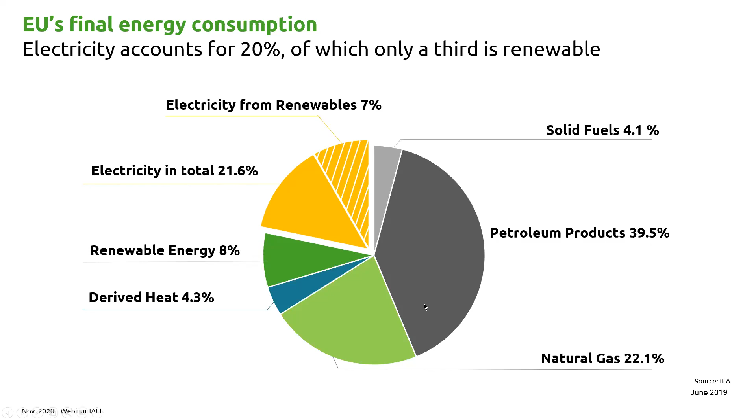But I think this pie chart alone shows that there's still quite a bit of work ahead of us to change the generation of electricity to renewables before we start producing renewable electricity for the other sectors which are using energy as well. So we need molecules, not only to achieve the decarbonization in all the sectors, we need them also for storage.

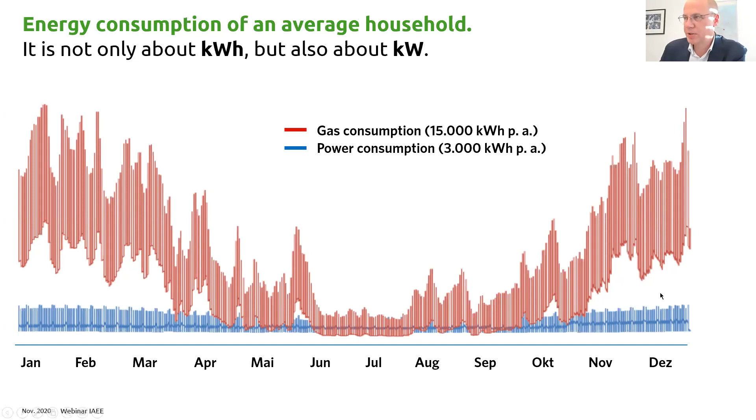And this has led to the situation that we see a very strong political ambition to move towards hydrogen. Not only do we have, since July the 8th, a European hydrogen strategy in place, which has a lot of perspectives on delivering hydrogen, but of course we see many national and regional hydrogen strategies. So the idea of using hydrogen as the second pillar of the Energiewende is trickling down to the individual governments and municipalities. And it's not only the European Union, but also its neighbors are clearly delivering in terms of hydrogen. So it is a very broad trend, and the individual economies are contributing with their individual perspectives.

I think the first market that we will see where hydrogen will play a role is, of course, those where hydrogen is already existent. We have 60 terawatt hours of hydrogen, for instance, here in Germany, being used mainly for the production of methanol, fuels, and ammonia. This is still gray hydrogen, which is waiting for decarbonization. So I think the very natural approach to a new hydrogen market is to replace the gray hydrogen, which is already quite a bit of hydrogen that needs to be produced coming from renewable or carbon neutral sources.

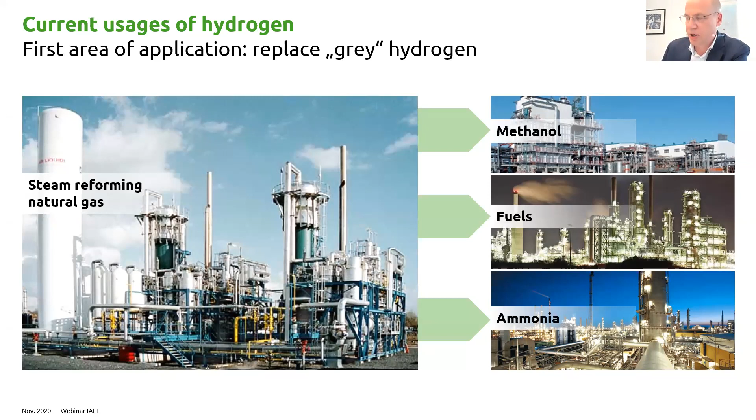But of course, the ideas are very wide-ranging where hydrogen can be used tomorrow. It could be used in turbines, it could be used in stationary fuel cells as combined heat and power solutions. Mobility is a very strong condition. And of course, industry, the German steel industry is strongly asking for hydrogen to move their processes towards carbon neutrality.

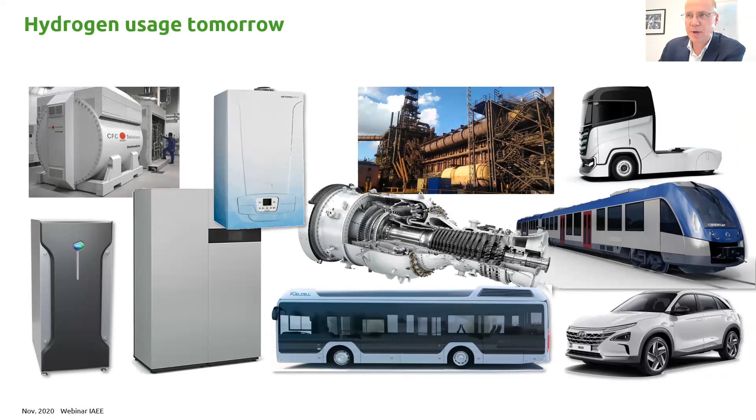But let me please focus on one specific area where we think hydrogen should play a major role as well. That's the heating sector. That can be reached by boilers, but also by fuel cells. I will show that later. Why the heating sector? It accounts for 40% of our energy consumption. It's mostly molecules. In Germany, we have still many boilers with oil. We have 20 million gas boilers. We have them connected to a grid that is able to deliver hydrogen to the home.

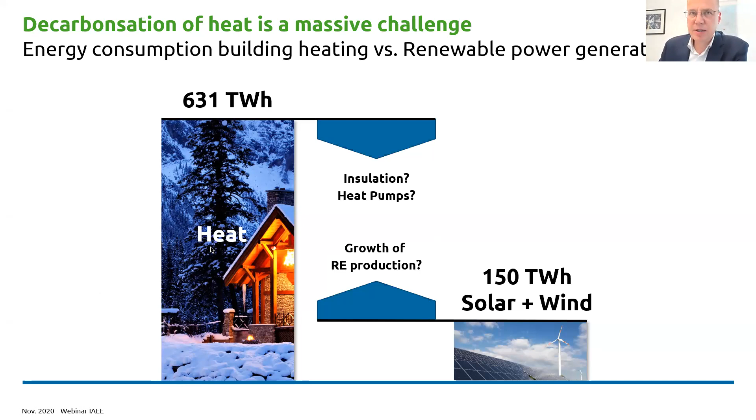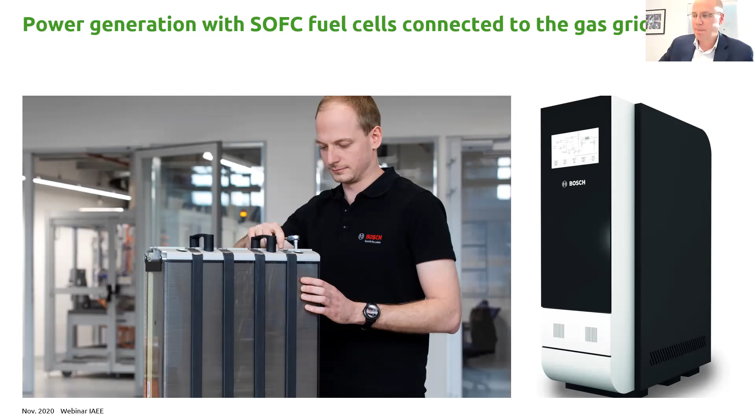We also have larger installations like the SOFC fuel cell coming from Bosch, delivering 10 kilowatts of electricity. It's scalable up to 1 megawatt, which is mainly focusing on decentral electricity production at an efficiency rate of 60%. It's producing electricity at a higher efficiency than many of the large-scale thermal power plants.

But where should the hydrogen come from? We should certainly focus on a broad range of opportunities. Electrolysis, of course, is the first choice because it's integrating renewables, it's storing intermittent renewable energy sources. But this alone, if you do the math, you will see that this alone will not deliver enough hydrogen to provide a contribution to the decarbonization effort. So we need other solutions.

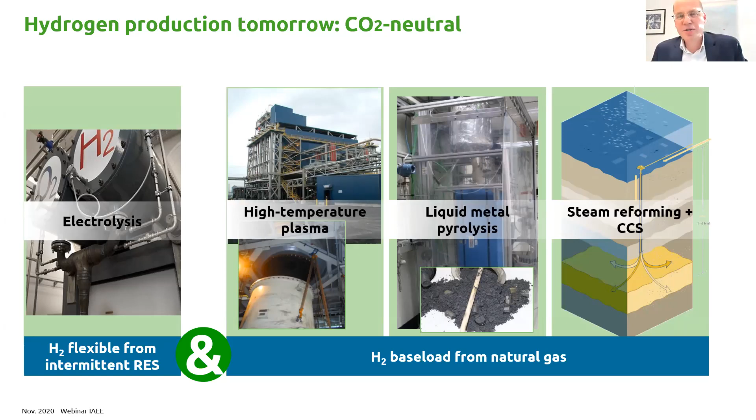We need pyrolysis as a solution. We need steam reforming. Particularly steam reforming is something that our Norwegian colleagues are strongly developing. Their very ambitious Longship project looks extremely interesting and promising. But we should also, and that's something I would like to bring to the discussion today, we should also look into the system of pyrolysis. Let me briefly show you what it's all about.

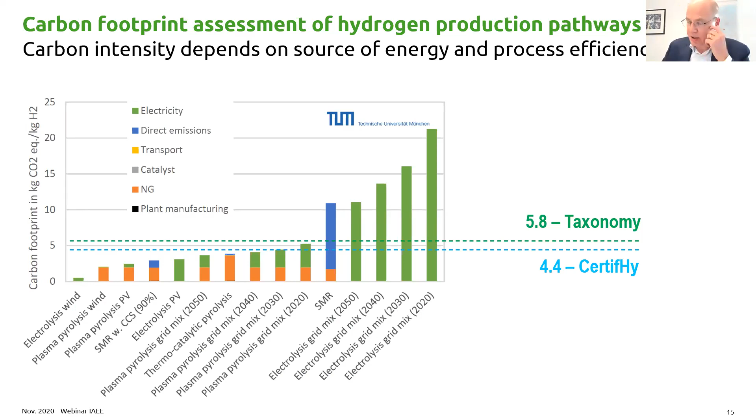You see that electrolysis, for instance, is very much dependent on the input energy, of course. You see also that other routes can deliver, depending on what kind of measure you take, if it's the EU taxonomy or the CertifHy project, carbon neutral hydrogen that can be used for decarbonization. And you see that particularly the routes with pyrolysis seem to be quite interesting looking at this comparison.

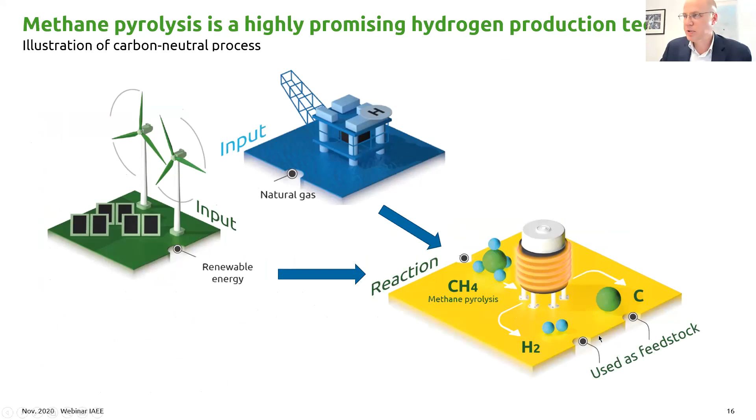Pyrolysis basically is nothing else than splitting up the methane molecule, CH4, delivering at the end hydrogen and carbon. As the feedstock, the process requires, of course, natural gas, which is an ample resource, and uses renewable energy as an input energy to split up the methane molecule into its core substances, hydrogen and carbon. Hydrogen can be used in the grid, of course, in different routes.

Carbon is an interesting feedstock today used for polymers, pigments, and also for batteries. In future, it can be used for building materials, soil enrichment, and other bulk resources where you need high amounts of this kind of feedstock.

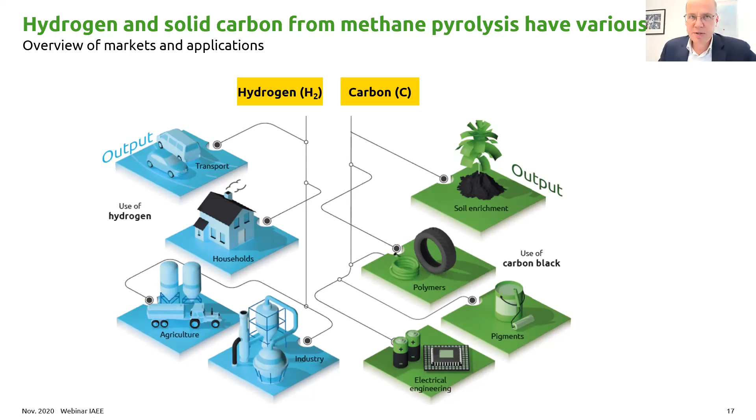Very interesting technology that should be considered also as a solution for further hydrogen production, and this is the core reason why we feel that this is a very fascinating solution, particularly because it's much simpler to split up the methane molecule than splitting up the water molecule that the process of electrolysis is based on. The chemical situation is that the bonding between the hydrogen and the carbon is much weaker than the bonding between the oxygen and the hydrogen atoms in the water molecule.

For this reason, it requires only 1/7 of the energy to split up methane in order to create carbon neutral hydrogen, because no CO2 is released into the atmosphere. And if you use renewable energy as a feedstock for this pyrolysis technology, you can create 3, 4, 5 times, depending on the engineering efficiency of the pyrolysis technology, and there are different routes available, 4 times the amount of hydrogen based on one input unit of renewable energy. So you have the factor of 4 based on the input electricity coming from renewables.

So a strong lever for linking the renewable energy production with the gas grid, and of course, multiplying the input energy coming from wind and solar. Very promising technology, linking also the gas industry with renewable energy so that we have a good solution for providing large amounts of affordable hydrogen.

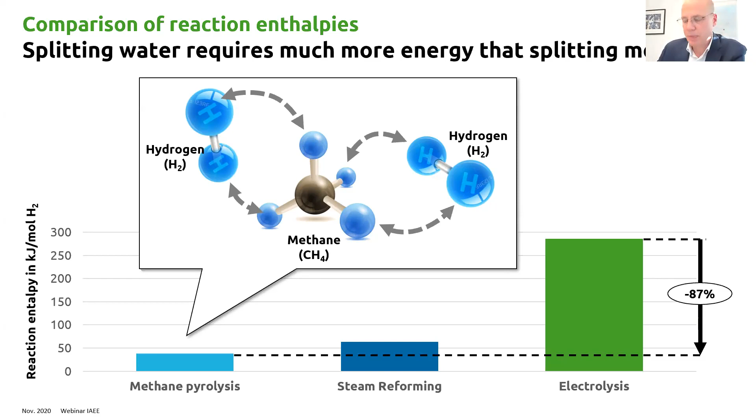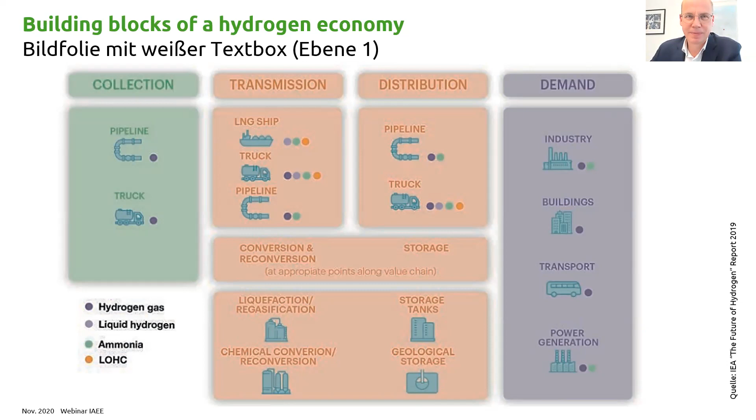Thank you very much, Tim. I think this was a very basic, sound and comprehensive introduction into what hydrogen can do in the system, what hydrogen can contribute, and where hydrogen comes from. From my point of view, this is not, in an international dimension, fully clear, because we are now discussing huge amounts of hydrogen from huge amounts of renewable electricity. And I think neither Germany nor Austria nor any other northern country will really be able to produce these quantities. However, Germany has already agreed with Morocco on a joint venture with respect to electrolysis from the desert, which is quite an interesting international idea.

So just a little bit on where I'm coming from, OGE, Open Grid Europe. Here you see a map of Germany, and basically this is showing the main transmission system pipelines that we own and operate. You see here also where we are located. It's the largest gas TSO in Germany. We have about 12,000 kilometers of pipeline.

Just for reference, the send-out to customers in Germany, which could be big industrial customers, or it could be DSOs that take over the volumes to distribute them further, was 650 terawatt hours in 2018. This is not including the transit volumes, which also flow through our pipelines, for example, from east to west or from north to south.

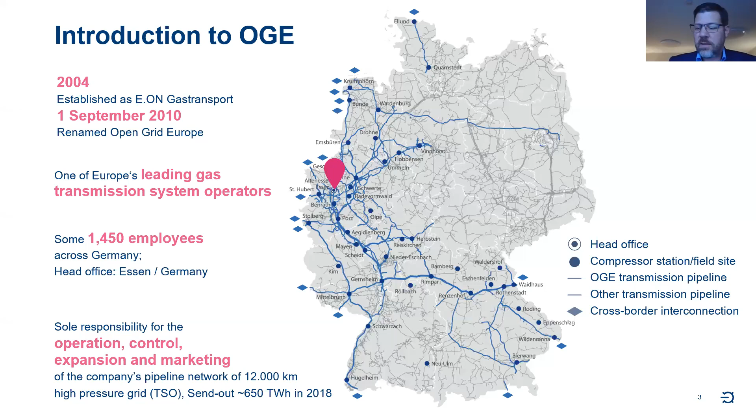So as Georg put it, if you're operating a national gas grid and you are confronted with the fact that we want to decarbonize, there are a few questions you need to answer, especially to your shareholders, as to what is your future contribution? Can you actually help in making this decarbonization a reality? So for that, it's important to know who we are owned by. And unlike in some other countries, the infrastructure is not a state activity, but it's privately owned. And we are owned by these big names that some of you may know. So institutional investors, managing pension funds, and very keen on a long-term strategy.

And when I was hired into the company, one of the first questions was really, what is the place for OGE in decarbonization? And what is our strategic answer to that? Which brings me to the big picture. And again, you will see some repetition of what Tim said, but maybe from a slightly different angle.

One thing which I think is very important: whenever we're talking about hydrogen, we're not really talking about hydrogen. We are talking about how we can achieve climate targets and find the most efficient way of avoiding CO2. And some of us, and I think especially Tim and myself are in this group, believe that letting hydrogen play a big role alongside renewable power might be a clever way to do so. So this is actually what we are trying to achieve. And we all know, here you see CO2 emissions, they're supposed to go down almost to zero in 2050. That is only 30 years away.

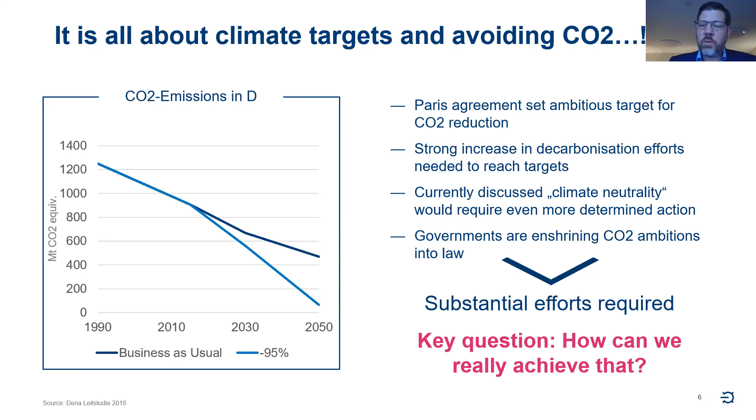And we are big energy consumers. So how can we actually achieve that? This is the key challenge that we all have.

It's also a problem that usually you don't have the green power in the area where you need it, so you need to build a lot of power lines. That's the capacity picture. Another view is the quantity, the energy amount picture.

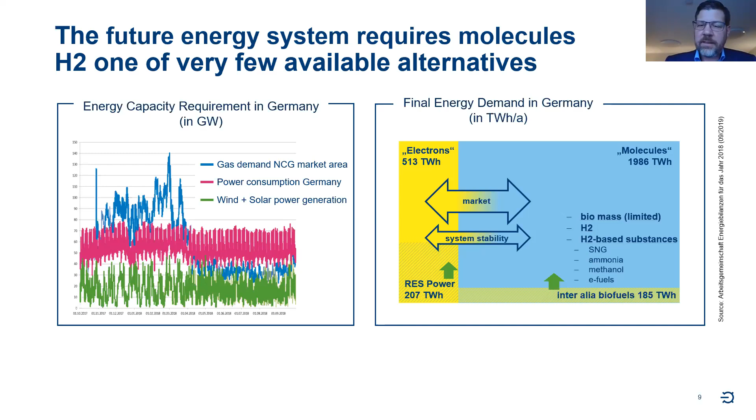If we look at today's technologies, depending on where you are in the world, you might have quite some potential on biomass, but we know this is not available everywhere. Then you pretty quickly end up with, well, if you have molecules, you have a chemical energy carrier — that could be H2 or something related to H2. This is why we came to the conclusion, taking these two pictures, you need to store and transport large amounts of green energy. You need additional decarbonization options available to all sectors, especially sectors where you have trouble decarbonizing with power. It's also not the worst thing to have an energy system standing on two feet: one electrons, one molecule, when it comes to resilience and security of supply.

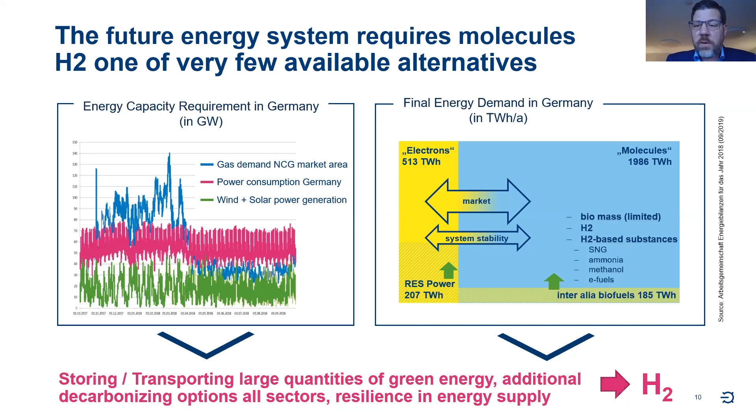So that's how we come to hydrogen in the first place. Now picking up on Reinhard's point, what's the difference compared to previous times? Why should hydrogen deliver this time? Well, I think there's five reasons for this.

The first one: we have a general awareness today that there is a lot of renewable energy out there on our planet. It's not necessarily always where we need it. That's why transportation and storage is important, but there is a lot of renewable energy, which may not have been the awareness a few 10 or 20 years ago.

I think the biggest difference is there is no alternative today. In the past, hydrogen came up, it was seen as technically viable, but extremely expensive. People said let's rather take oil or gas because we have it and it's cheap. If we want to defossilize the industry, that is not available anymore, so we don't really have an alternative.

I think also we have become much more comfortable with economies of scale. If you look at the development of the cost of solar or wind energy, that has decreased big time. That means producing power with renewables is much cheaper, and electrolyzers, who today are mostly put together by hand, could be much cheaper if you think about industrial production.

From a European perspective, Europe has a front-running option. We have a very interconnected gas infrastructure all across Europe. If you could make that available for hydrogen, you would have a basis for a European market, many sources, many sinks, that would also attract imports. And finally, we are in Corona times. Everybody's looking for economic stimulus, and hydrogen is offering quite some opportunities for industry leadership.

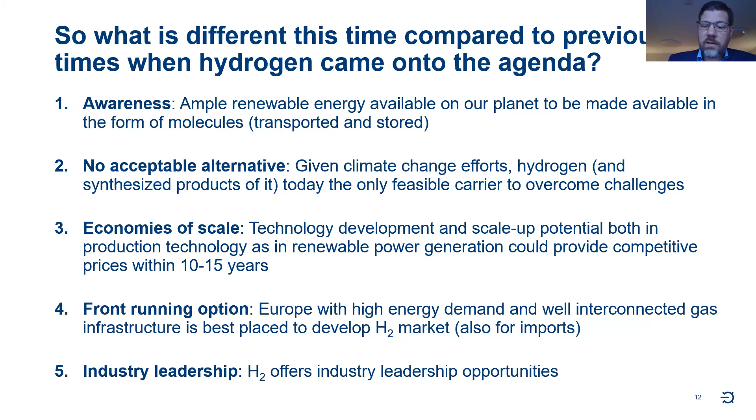If you dig into the subject, you will find many studies over the past 2-3 years that have concluded that the societal cost benefits, if you look at a mix of renewable power and green gas or decarbonized gas, are actually substantial.

Little spoiler alert, I'm coming to this later on. If you're using a gas pipeline with hydrogen, even though hydrogen has only 1/3 of the energy content per cubic meter, because the molecules are smaller and it actually flows faster, our experts, alongside the other European pipeline experts, have done analysis and concluded that your pipeline has about 80% of the energy transportation capacity if you use it with hydrogen.

So what does it mean for us as an industry? Well, the first thing is we cannot claim something if we really don't understand our assets. So we as OGE, and we know the other TSOs have done similar projects around H2 suitability, are really understanding all the components in our asset, existing pipelines as well as new pipelines. What about blending? I'll come to that in a second. And what about 100% hydrogen? We do that supplemented by exchange between companies and also with the associations. So a lot is ongoing, and we will see results being produced one after the other, which so far all look very promising.

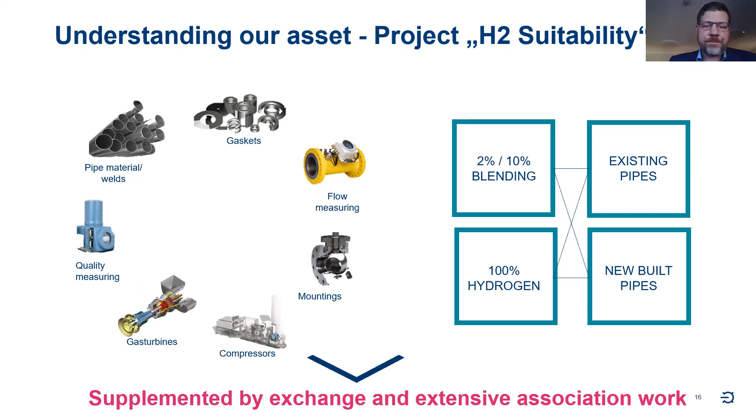The main reason for that is that we want from the outset to be prepared for trade, a European market, and security of supply. If you want to make sure that cross-border you have a free flow, it's much easier if you know it's 100% hydrogen rather than having potentially different blends in each country.

Also, if you transport hydrogen on a TSO level in a pure form, when you go further to the DSO level you're much more flexible. You can provide it to industry that needs it in pure form, or you can blend it on a regional level depending on the circumstances and the production facilities there. There are many reasons, and I can give you more when we discuss.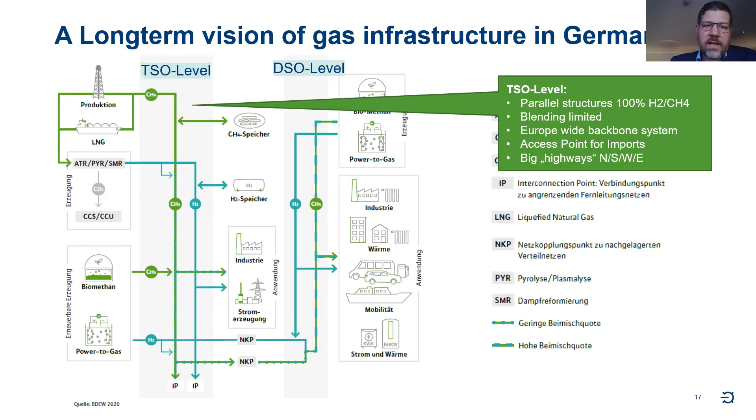So summarizing: at TSO level, parallel infrastructures, blending only on a very limited basis, this is the Europe-wide system and an access point for your imports - like the big highways, north, south, west, east. Whereas on a DSO level, we see more regional variety - there could be 100% hydrogen grids, blended systems, or biomethane. The DSO system actually benefits from methane and hydrogen pipelines bypassing each other, because then you can do pretty much every blend that you want.

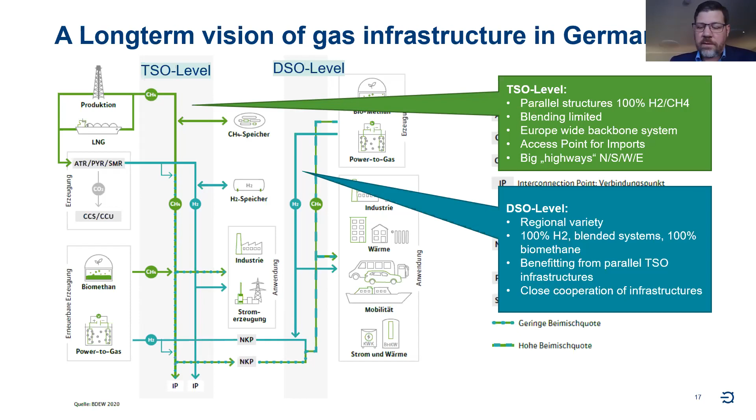The German TSOs has actually gone a step further. We have an established network development plan process, which is legally in place and approved by the regulator. We took this process and thought about how to take it forward.

We said, well, if the future system is partly depending on repurposed pipelines, we have to include it in the planning process, because the pipelines you take for hydrogen will not be available for methane anymore. So we asked the market for where their demand for hydrogen entry or exit from the system would be, and then calculated in a scenario planning how this grid would actually look, based on current market assessment.

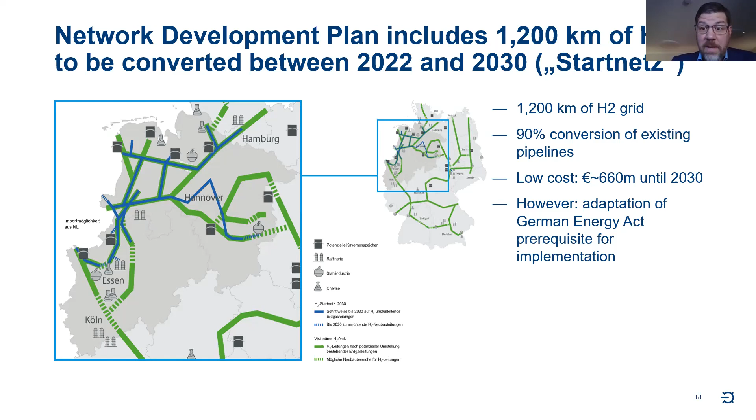You see here a part of Germany with the blue lines, which is what we call the Startnetz, the starting infrastructure where the first conversions would happen. Then the big picture, if you zoom out, shows all of Germany with the green lines - this is a 2040-ish view based 90% on converted pipelines, where we could access most of the demand areas and create a hydrogen infrastructure mainly based on what is there today.

As OGE, although focusing on infrastructure, we are cooperating with a whole load of companies to develop various perspectives, because we believe we need to get into this upscaling - getting away from the 1-2 megawatt electrolyzer and production facilities to 30, 100 or 1,000 megawatts, which is the gigawatt class, and the implications for infrastructure that has.

So just to give you an idea, over and above the pure infrastructure play, we're trying to cooperate with others to demonstrate how this could work and get the first real projects off the ground where we could actually look after the infrastructure for that.

So coming to the European perspective, which is the high point of this presentation. What we did, and this is a pretty full slide I'm aware, is that I happen to be the chairman of the European Gas for Climate initiative right now, which is a group of 10 European TSOs and 2 biogas associations looking at what our contribution is, and what green gas and infrastructure could actually contribute to a carbon neutral energy system in 2050.

We said all of what we see in these various countries, like the German example, is happening in other countries too. And the big advantage and strength of the European market is that we can actually think it together. We have a secure framework for investments, low country risks and all that. So let's look at each country and sit together from an infrastructure perspective, how this could over time basically grow together. And the result of this is the map you see here.

And the fact that some countries are gray is not that these countries are not included. It basically just pays tribute to the fact that we are a group of companies for those countries, and we are used to working with each other very fast and agile for the last 3 years. So we said, let's just start with that and then see how it develops further.

And the map you see here is a map for 100% dedicated hydrogen infrastructure, which would start with about 6,800 kilometers by 2030 and then develop into about 23,000 kilometers by 2040, which is probably not the end point, but it shows you here what the reach is. And then you actually can connect the east to the west and the north to the south.

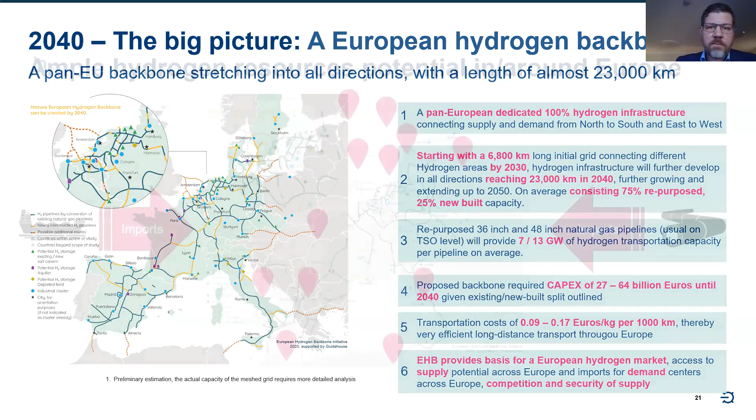Just to give you the idea, Tim already asked the question: where is this all coming from? This is very illustrative. There's more information to that, but if you just consider within Europe the very windy offshore areas, and also the solar areas in the south, you end up with quite some potential. So I would question, even though I know the question that always comes up, that we don't have enough renewable power alone, so how should we get all this power to produce this?

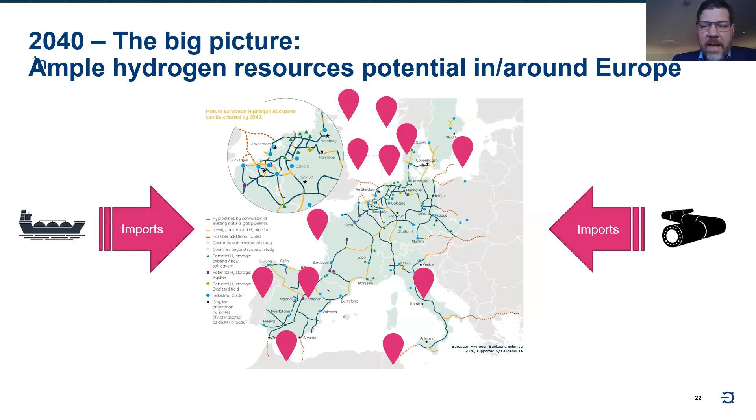I'm inviting you to a back-of-envelope calculation, sorry, it's afternoon, more tea time than looking at numbers, but just a simplified example. In our Gas for Climate study, concluded in April this year, we found there could be as much as 1,300 terawatt hours per year demand for green hydrogen. For simplicity, let's split it 50-50: 50% from wind, 50% from solar PV, so 650 each. Assume for offshore wind we have 4,000 hours load factor and about 70% efficiency in the electrolyzer. That would mean we need 230 gigawatts, about 23,000 wind turbines of the 10 megawatt class.

Now it sounds huge, and this whole energy transformation is huge. But on the other hand, Agora Energiewende, a German think tank for energy, suggests an offshore wind potential of 500 gigawatts for Europe, just to put things in perspective. So we need big decisions, but it's not unreasonable to consider that that's possible.

If you go solar, 2,000 hours, same efficiency, 465 gigawatts, which equals about 4,650 square kilometers of solar PV area. Again it's big, but not as big as it sounds, because this assumes you do this all in one space, in one place. How much of a share is this of the regions we're talking about?

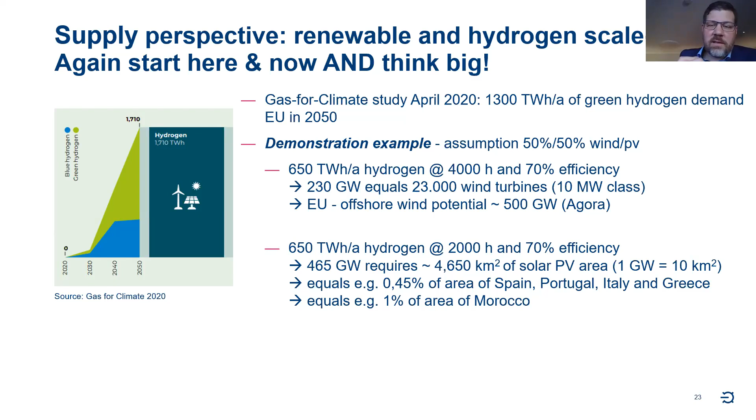Just two examples here. I think it's important that we start here and that we start now, but we have to allow ourselves, and also the policymakers, to think big, because ultimately if you want to start with the first steps, you need to take the right direction so that you allow it to be big afterwards.

So concluding, we say infrastructure provides you with physical access to multiple sources of hydrogen. It provides non-discriminatory access to transportation, import and storage sites, which is important if you want a market with no discrimination. As the TSOs, we're experts in gas transportation and in integrated infrastructure planning. That's also important, because if you build an electrolyzer, that has implications for your power system and power infrastructure. We have close cooperation with the DSOs, which in my view offers a lot of decarbonization options.

So the next steps, which is also important and which we can discuss: the one thing you need, of course, is policymakers to set the legal frameworks right. Today, in most countries, hydrogen as an energy carrier is not foreseen legally. So everybody owning infrastructure can be prepared to do the nicest things, but they need a stable framework also for their business model, of course.

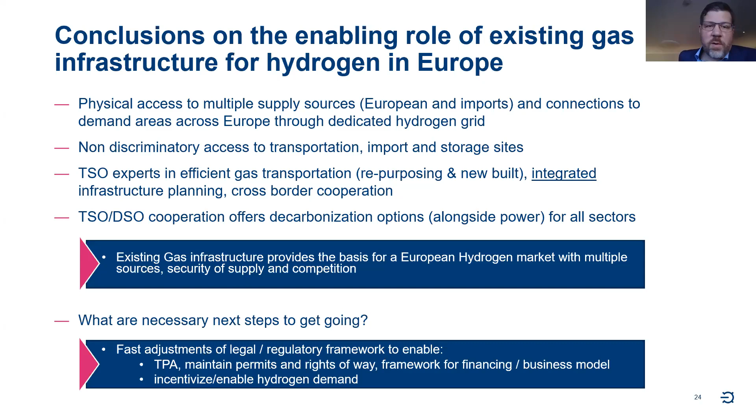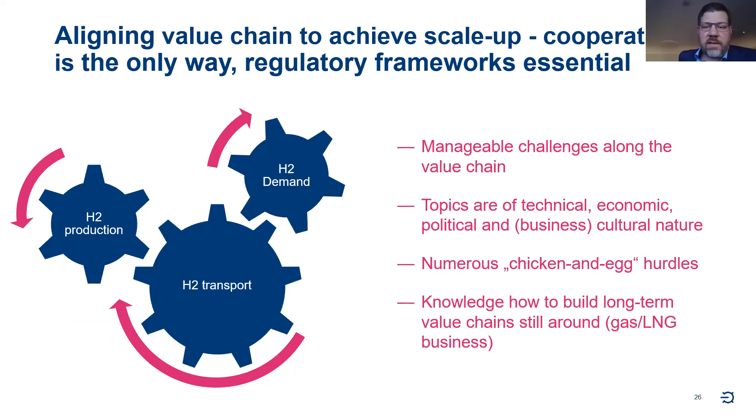Finally, the outlook. I think it's very important for everyone to acknowledge that it's all about aligning the value chain to achieve a scale up. Cooperation is key, and we have many challenges to manage. But on the other hand, the momentum we see right now, and this is my concluding remark, if you look at all the national hydrogen strategies published just over the last two years, you see how the momentum is rising. I'm very confident that we see the hydrogen era. This time it's dawning, Reinhard, this time it will deliver, and we'll see a global market. And with that, I thank you very much.

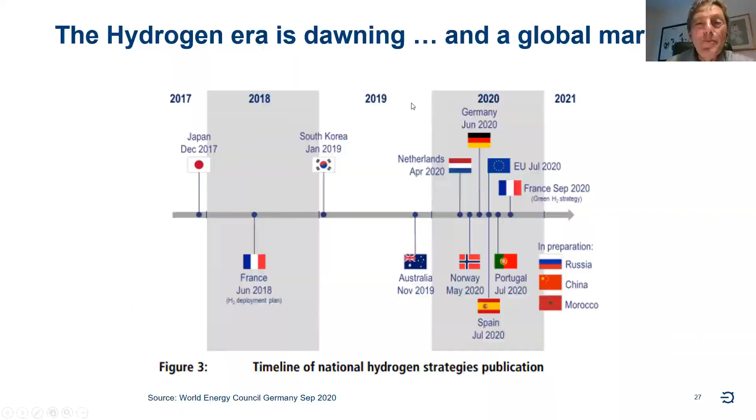Thank you very much, Daniel. I think one of the big advantages of your study and of this work you presented here is that you discussed with the customers. It's not a scientific exercise where we discussed in the academic world among engineers, economists and legal people, but you discussed with customers. And I think this is a step forward, and your presentation showed that you really have made a step forward, and this makes this presentation particularly interesting for all of us.

But I must say we have a lot of rather interesting questions, and I hope we are able to answer most of them. I would like to go through these questions, and the first one is from Tim, and he asks, what are the efficiency rates of pyrolysis processes? Is there some experience about this? It's a simple but very telling and important question, because it's all about efficiency at the end of the day.

That's for sure. If we look at the challenges that we're facing, it's about decarbonization, and if you look at the scarce resource that we have, which is renewable energy, efficiency should be defined as how much decarbonization we get from one part of renewable energy. And this is how we define the efficiency of the pyrolysis process. So if you put in one part of renewable energy, you will gain something like 4 parts of hydrogen, which is carbon neutral at the end of the day. So you have a lever of 4, roughly speaking, given the technical efficiencies behind it in terms of decarbonization.